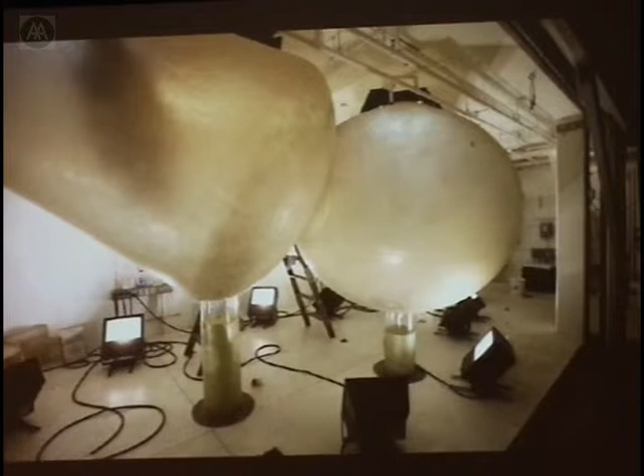In the end, though, it was less pretty women that came investigating the things — we had actually tried to partly hide in the basement. We had probably also not anticipated how difficult it would be to contain the crowds gathered outside. The screaming was so loud that the architectural concept was nearly failing, and you couldn't have any normal conversation inside during the opening day. We almost had to raise the wall again to protect the inside and make conversation possible. In the end, it was maybe more important to realize that the architecture was simply just a footnote, and that it would disappear behind things that really mattered.

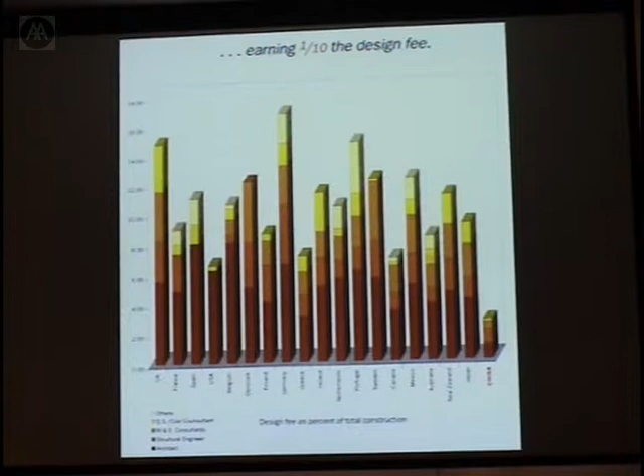It's maybe good to quickly remember what Rem did with the Harvard students years ago, investigating the conditions of Chinese architecture production, which still haven't changed dramatically in most cases, at least not in 2002 when we started. I think the last 3 years have actually implied a rather dramatic change. China had only about one-tenth of the architects of anywhere else in the world, producing 5 to 10 times the amount of square meters designed for ultimately one-tenth of the design fee. Now we're in the middle of it, both in the fees and in the speed and in everything it entails.

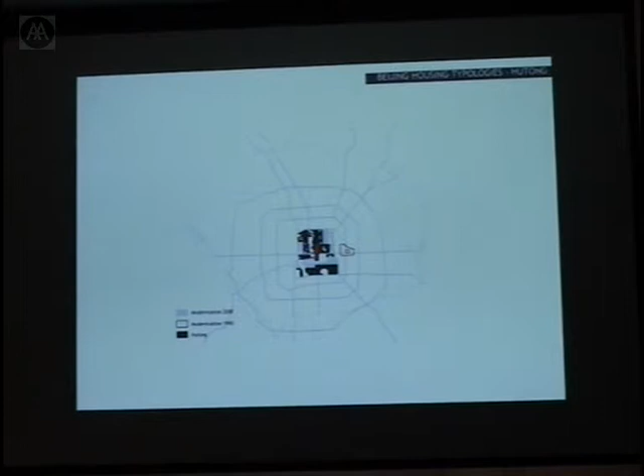At the center of Beijing is the Grand Palace, or the Forbidden City as Westerners call it. Around it, within the second ring road, is the old inner city structure of historic courtyard houses, the hutong, that basically made up Beijing's city fabric for, you could literally say, thousands of years in a very stable and permanent environment.

In 1949, things changed, and Mao declared: smash the old and create the new. After basically a decade of building factories and staging the industrialization of the country, the first real architectural manifestation since the historic age were the 10 Great Projects in '58 and '59, all about 100,000 square meters large, commissioned, designed and built and completed within a single year, less than 12 months. It's very obvious that at that point expertise and architecture were closely related to Russia.

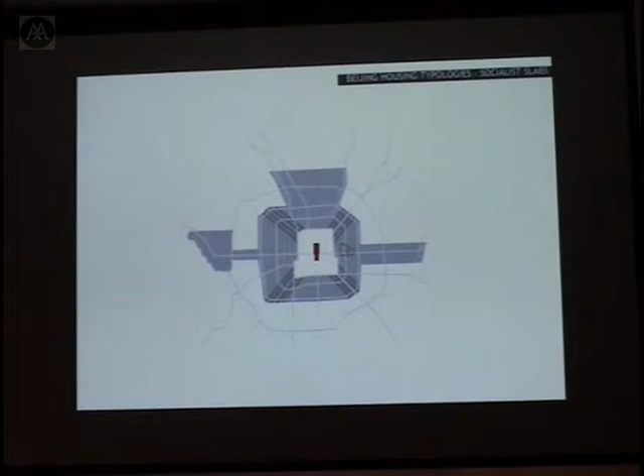After that, the city started to grow rather rapidly in a concentric development around the Forbidden City. Ring roads were built, and the 80s brought a large boom of housing development as a follow-up to the 70s baby boom and huge population explosion. So this is how the city started to look around this area of hutong.

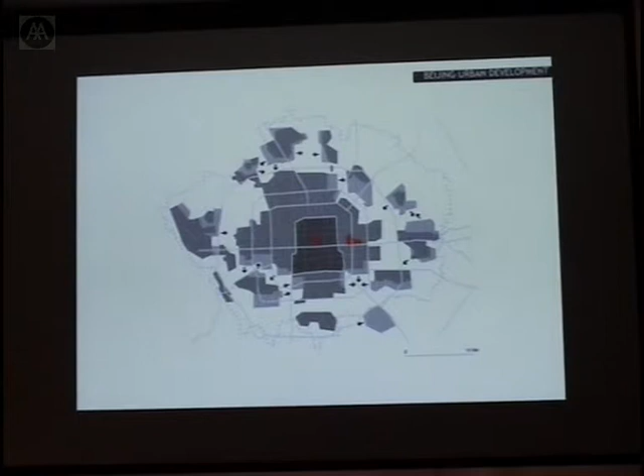While the third ring road was only completed about 12 years ago, in '93, '94, today the fourth and fifth ring roads are complete. The sixth ring road is 80% finished and in use, and the seventh ring road is already under planning. So basically within a single decade, this city literally exploded outwards, and that has obviously meant dramatic transformations for the city and for the life in the city.

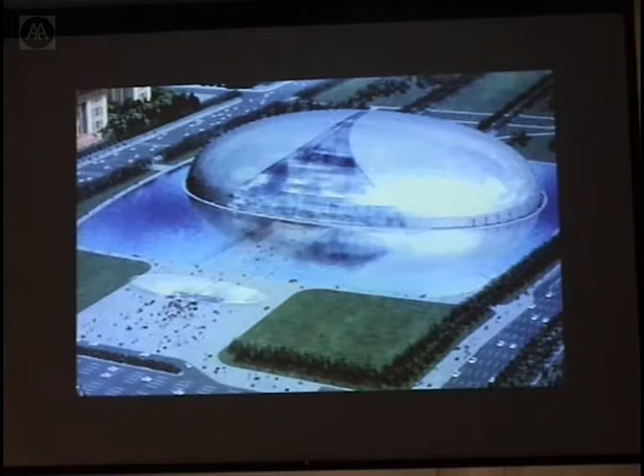But this was only 7 years ago the declared future of China, where foreigners made their first big statement when Paul Andreu arrived to design and win the competition for the Grand Theater right next to Tiananmen Square, basically giving this poached egg, as they say, swimming in a large water basin. Obviously this project has undergone, since Charles de Gaulle and other things, a whole series of loops that one could probably lecture about entirely another time.

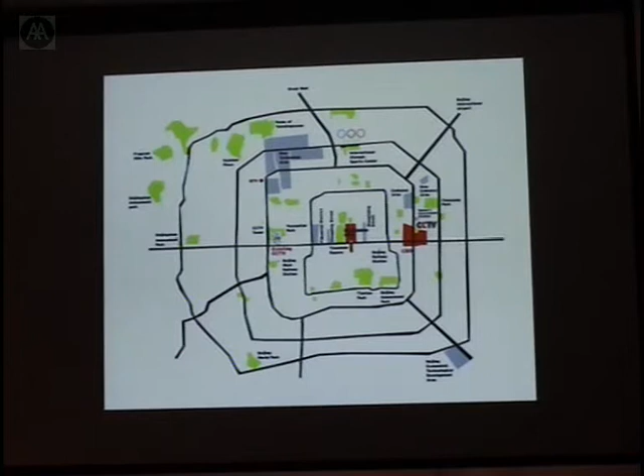CCTV is currently located at the intersection of Chang'an Avenue, the main east-west axis going through the city. In the center, the Forbidden City. This is the second ring road and the third ring road. It's currently located in the west at the intersection of the Third Ring Road and Chang'an Avenue, and will basically mirror across the Forbidden City to the east into the new central business district. The site itself is of an almost unimaginable scale, 20 hectares in the middle of a city.

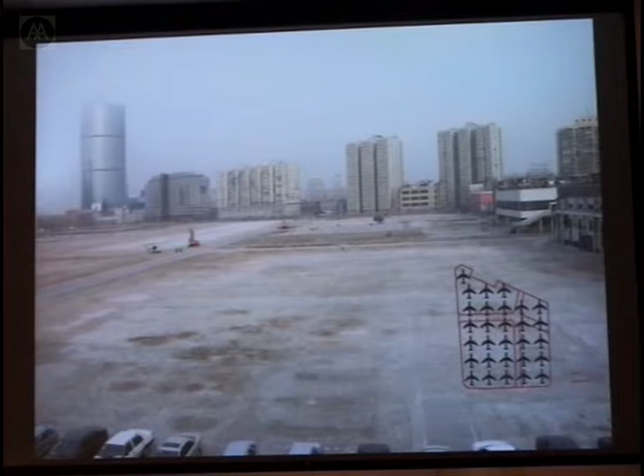And the context is one that's hard to imagine, a tabula rasa that has simply taken away everything that existed on the site. There were car and motorcycle factories that had gone down and were taken away about 2 years ago. And the only sense and certainty you had of the future of this place was this rendering given by the city planners of Beijing, of the dream of how the CBD should look like more or less by the Olympics, so in 3 to 4 years.

It's a very difficult context to design in. On one hand, there is this enormous city with this enormous strength and power, with dimensions that, both in terms of street and buildings, are beyond any scale you've seen before.

Tiananmen Square is also still the largest open urban space in the world. And then there was this vision for a future, a vision given by a dream of 300 skyscrapers emerging in this area.

The moment we came, these are the two towers of the World Trade Center. Here behind is the Kerry Center, and then Jingguang Tower. These were basically the only towers that existed when we started working on this competition. And all we knew was that there would be skyscrapers all over.

It was obviously a very interesting moment for the office to think about a skyscraper. Since Delirious New York and everything that had meant, we realized that OMA had never done not only a skyscraper, but probably not even a vertical building. Everything kind of ended up magically flat. And you wonder how that works with that beginning.

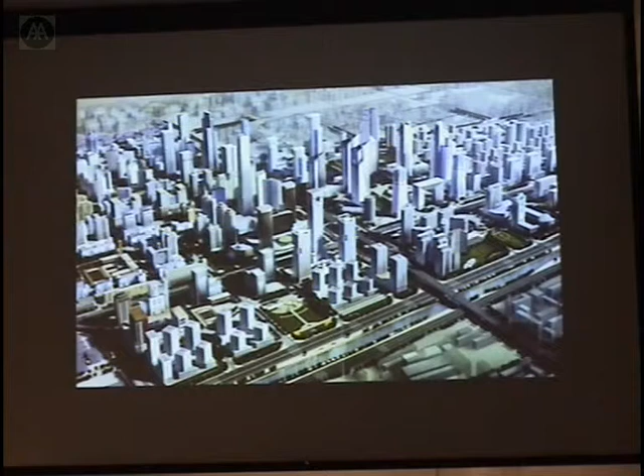But what is happening today, most central business districts have absolutely no such density as Manhattan. Instead, they isolate all towers in a kind of surroundings of green. The only purpose of the skyscraper is to multiply an ultimately valuable piece of land as often as possible vertically, to maximize profits. All that's left is this needle-like piece with no relation to the city, no connection to the ground. At the bottom, a socle or plinth tries to compensate for its inertness, and at the top, there's either a flower style or modernist composition decoration trying to compensate for the ultimate lack of identity.

About 2 years ago, for the first time in history, Asia actually has more skyscrapers than the West. While the skyscraper was born in the US, Asia clearly adopted this typology as the symbol of the growth of its economic power and its modernization. Perversely, this is happening exactly in the past 20 years, when precisely the West, who had initially created this typology, had stopped thinking or writing about not only this typology, but even the city at large, to provide possible starting points for further development.

We felt it was obviously about time to see if there were other possibilities and another sense of designing a structure that would not be all about height, but about re-engaging space and city space, and maybe also a programmatic and content-related configuration that would start to draft up a new possibility.

CCTV is already today one of the largest media organizations in the world, with 14 self-produced TV channels. When the new building is complete, CCTV will be able to broadcast more than 250 channels from this single structure.

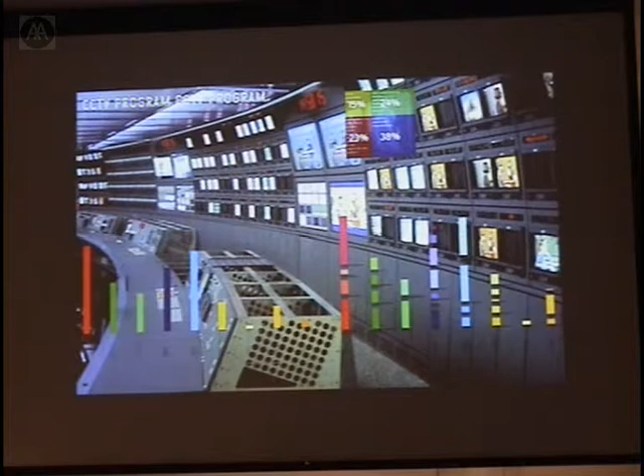The current CCTV site is entirely gated and hermetically sealed, basically, from the public. So this project was also clearly announcing a context of interest in opening up and making itself more accountable to the public, and this was obviously an important part of the design.

We proposed, instead of combining all elements, to actually split the program in 2 parts and create 2 main structures. The main building, CCTV, which accumulates and summons all activities of television making in a single building, and the second building, TVCC, the Television Cultural Center, which would be the entirely public building and contain a 1,500-seat theater and all kinds of other public facilities.

The split we proposed was to guarantee at any point in time the perfect functioning of both entities, because it is still rather unpredictable how quickly security concerns will either heighten or lessen. And even in the wake of something like September 11, any security concern of a high-rise structure now has to be viewed under a different angle.

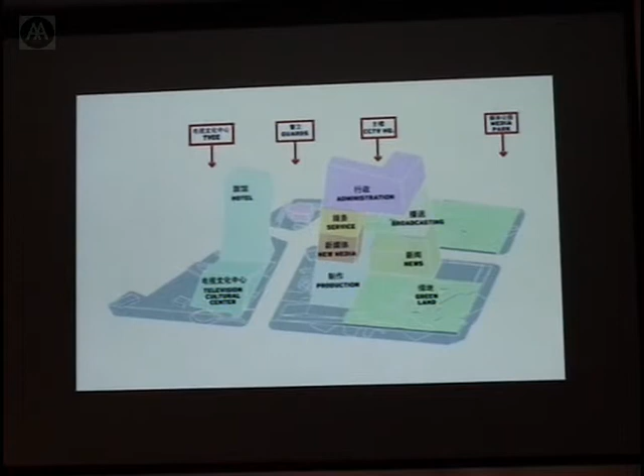So we proposed 2 buildings to guarantee that the public building could always be public, while the main building could oscillate according to need between a secured or also an open structure.

The most important step for CCTV was to propose a loop of interconnected activities where offices, administration, news and broadcasting, program production, services, and research and training centers—so the entire process and all the elements involved in the actual television making—would be combined in one single structure.

The idea was to declare something like solidarity rather than isolation, and propose a structure that would allow for a much more concrete and direct collaboration than opposition between the departments. In the end, a system where the brains would know what the hands are doing, and it might seem more obvious to propose that than it really is.

We already had noticed while working for Universal Studios in the second half of the 90s that most media companies are in a complete disconnect of their departments. Obviously, the world of the digital contributes more and more to a possible physical isolation of the different pieces. And in the end, an organization is not only no longer capable of representing itself, but also of operating or thinking as a single body.

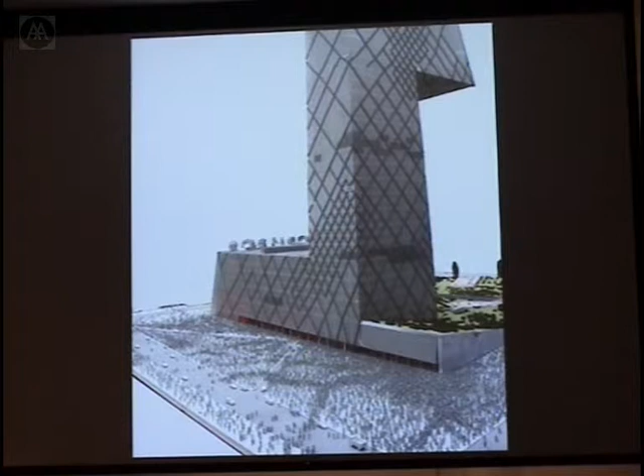And it is maybe not only this, but also the 10,000 permanent staff that continuously occupy the building and the several thousand visitors every day that propose to think of the structure maybe much more as a collective than simply a building. And maybe also this idea of the collective is one that has a specific resonance with a socialist context, and could possibly declare a kind of architectural alternative to a political inevitability that apparently the market and the so-called democracy has become.

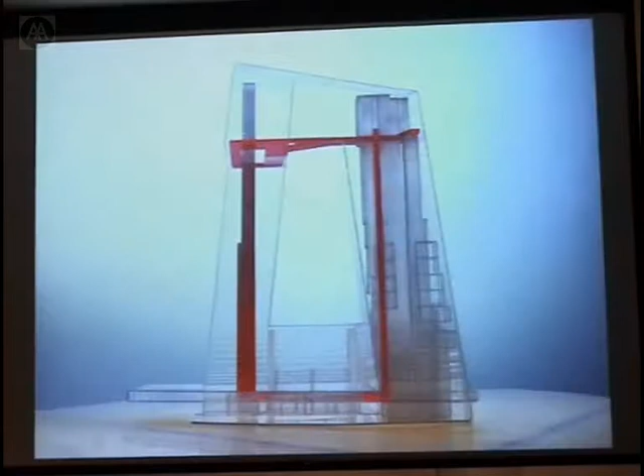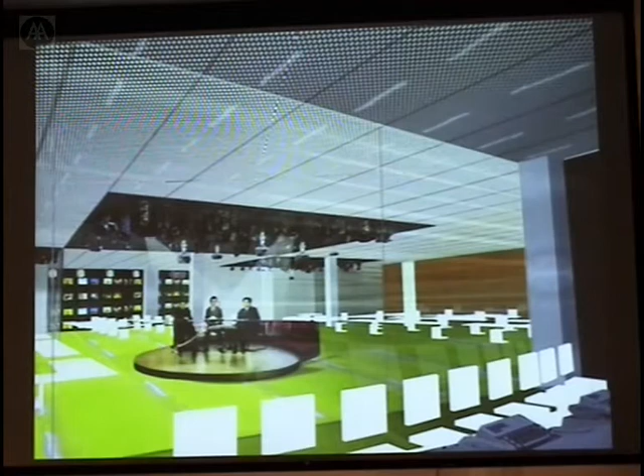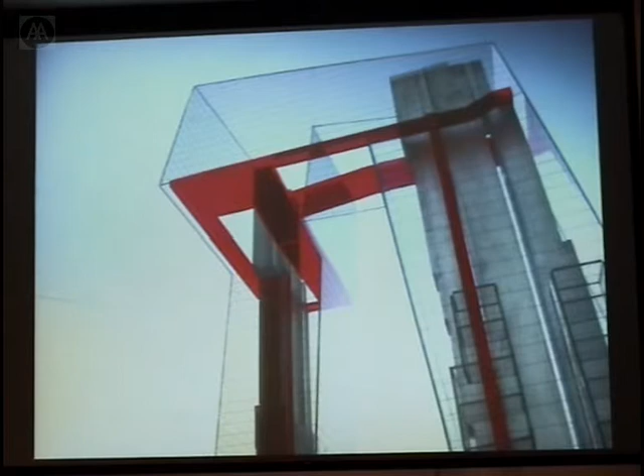The building is basically threaded up by this loop, as we call it—a circulation system for both staff and public visitors that are readmitted to the building to actually circulate through and not only experience CCTV as a media organization, but also visit the studio part, this kind of central city of large volumes with director control rooms and actors' lounges, the main broadcast control center in which the 250 channels will be checked and broadcast, new studios in one of the towers, offices and administration, and ultimately within the overhang at a cantilever of 70 meters at 180 meters height, a public viewing deck onto the city.

Obviously, these numbers imply entirely different needs for the organization of a building. We had to really design a space that would be able to channel 15,000 people daily into and out of a building.

The main lobby exists on 3 levels with a direct connection on B3 to the subway station, the main ground level, and in between layers connecting to the underground parking around the building. The lobby itself splits up into a system of fingers that separates permanent workers and staff from visitors with different security concerns, or the tourists that can actually move along the loop.

The geometry of the building, while the inside is entirely based on an orthogonal system, both towers slope 6 degrees in 2 directions and are then joined at the bottom by the base and at the top by the overhang.

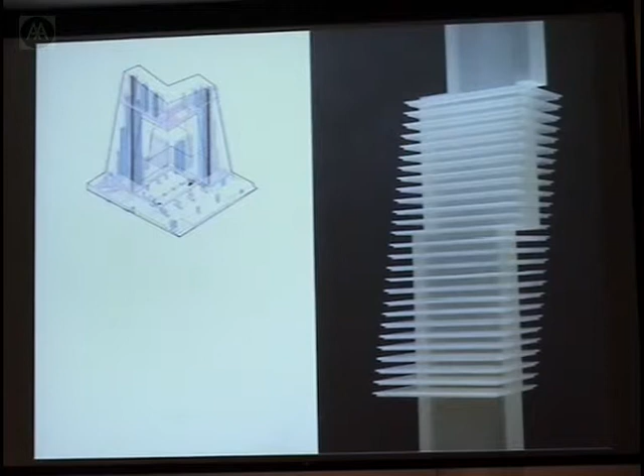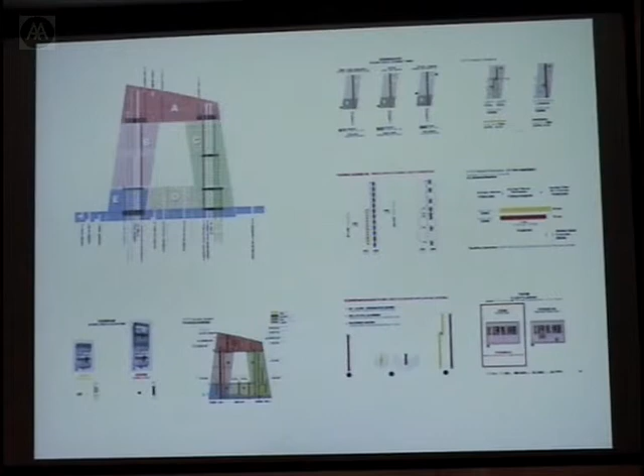Inside the towers, the cores remain completely vertical and contain an elevator system that is probably the most complex ever designed. About 99 elevators serve the building in a system that uses double-deck elevators, so 2 cabins traveling in a single shaft to save space and shuttle people up to the top floors, because it is obviously quite unusual that an actually large building sits on top of a smaller building like a tower.

The structure for the building - while maybe a more traditional approach would have been to split the building again into its different divisions, into isolated sections of big mega frames that would then be connected in themselves - we felt it was maybe much more appropriate or interesting to also here think of the structure in a similar way to the programmatic contents, as a continuous piece, as a loop of continuous forces that would surround the building.

We proposed to cover the building in a triangulated mesh of a steel structure of 10 by 10 meters, so the outer surfaces would actually act like a tube folded in space, and the surfaces themselves would become the main carrier and distributor of the stresses in the building.

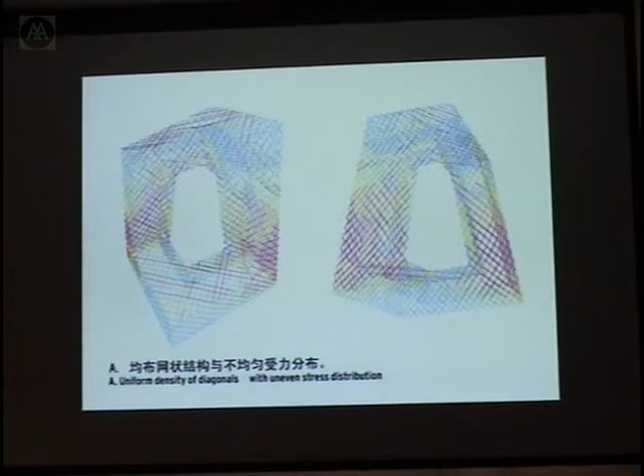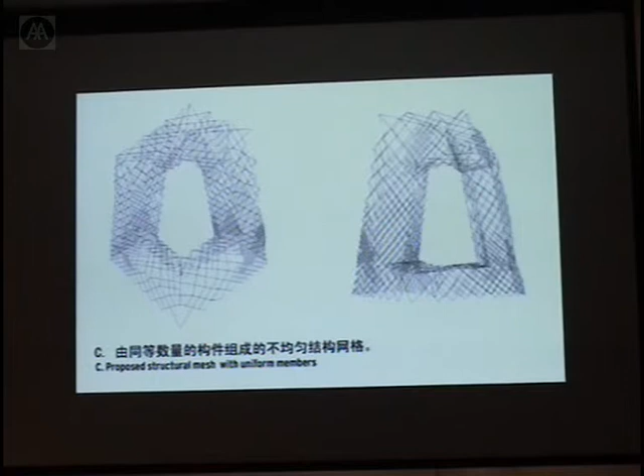Obviously, this complex geometry has by no means an even occurrence of these stresses. What you can see in red are the zones that have to work much harder than others. A more traditional approach would have been to dimension each member differently according to the stress, but we simply added members where more stresses occurred and eliminated them where less forces would occur inside the structure. The result is something rather irrational and unstable looking, but obviously representing in the end the perfectly stable condition of the building. This gave our engineers a lot to think about, and also us to worry about.

In the end, China, nonetheless, it is probably one of the most complex structures ever engineered to date. And China was simply not capable with their traditional means to assess and approve this structure. Maybe many other countries would have been in a very similar situation.

But it is maybe also part of this enormous dedication of that country to the idea of making things happen, and to not stop at their own limits, that a whole new process was thought up to deal with this project. An expert panel of the 13 most senior structural engineers of China was put in place. Expert panels do exist in China, but usually it's a group of people that at the end of a design process simply looks at the design and checks if it's all okay. Here it was a really intense collaboration over a whole year.

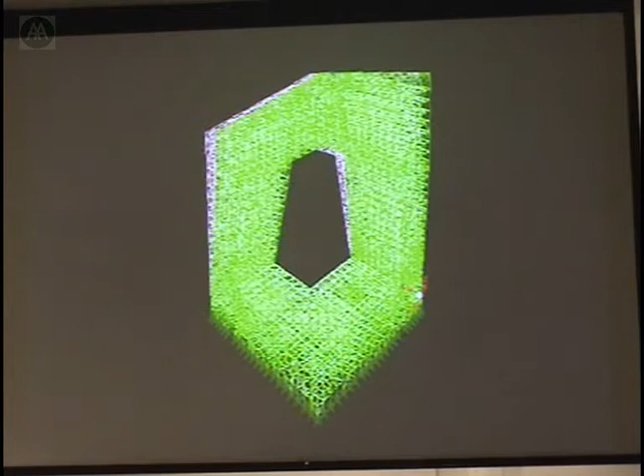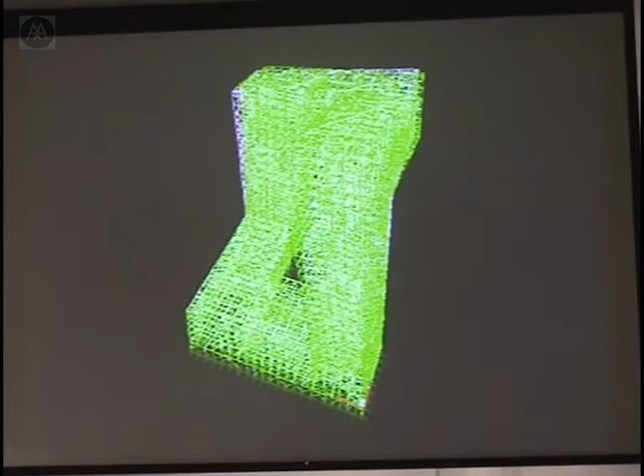Beijing is an earthquake zone, almost as severe as Los Angeles, one of the most severe places to build. So the analysis of the project had to be absolutely detailed and intense. There were more positive moments where the building seemed to nod yes and support it, but there were also more worrying moments, down to almost belly-dancing like situations that could occur.

Ultimately, the structure was designed in a way in which the performance of basically every single one of the 10,078 steel members is known. It's probably by complete accident, but nonetheless interesting, that the number of steel members composing the building is the exact equivalent to the number of people that occupy the building. But it was maybe that and a really intimate knowledge of all the parameters that would shape the design that probably outdo anything ever analyzed about a building before.

Down to the point that the system defined by Arup of not only building up the two towers, but then ultimately connecting this big cantilever in the air, was defined to the degree that this connection could only be made around 6 a.m. and at no other time of day, when the night was at its longest before the sun would rise and both towers would have cooled down to the maximum, to limit the differential stresses inside the structure.

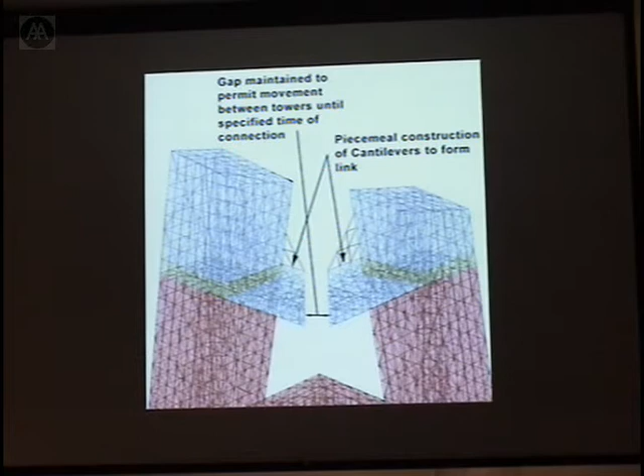Rory, who was actually the engineer on the previous project, is also here today, and we have spent the last years in a sort of intimate embrace on this design.

His wife is also here, but I don't know what she's saying.

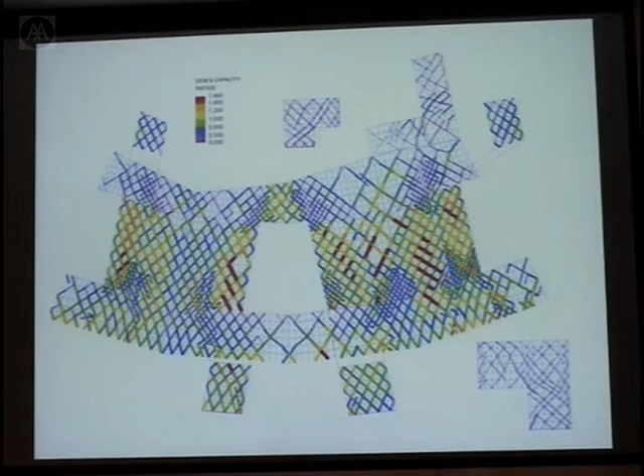And it has really been, in a way, an incredible experience and also an incredible experiment of generating a complete hybrid between architecture and structure, in which both things at this point are completely inseparable and really compose, if you want, the true nature of the project.

For anyone who's ever been in Beijing, most likely what you've seen is this: 70 to 80% of the time the air is not clear and there's no sunshine, but it's actually milky white - a kind of Beijing blur in the air. It's partly because of the approaching desert, so they say, but also the many construction sites in the city. It's a condition that's kind of serious, because it ultimately makes almost all architecture look incredibly bad, and especially any glass high-rise building look incredibly bad. So it's something you can't ignore when you design a building there.

At the same time, obviously, what could happen is also extremely crisp light and sunshine. So how could your building possibly perform in both those conditions? The only buildings that we thought actually survived in both were the ones that weren't completed yet - the ones covered by a nylon mesh and a steel structure, kind of green solid monsters that inhabit the city. And we thought our building could be very similar to this in the end.

What we propose is something based on the glazing that we first developed for the Seattle Library, a kind of laminated mesh inside the glazing that in this case really assimilates a lot of the properties of these green nylon textures, that from the outside is almost solid, but from the inside is completely transparent and lets the city basically shine through. The structure itself we express on the facade - it's basically like a dissecting mesh, almost like a bound figure that structures the big shape into smaller units. These units perform as structurally intact and very tight elements that for all the movement tolerances simply use the lines of the structure to take up and absorb these issues. But the facade itself, in the way it relates to the structure, sometimes the shape itself appears, sometimes it disappears, and only this network remains in the sky.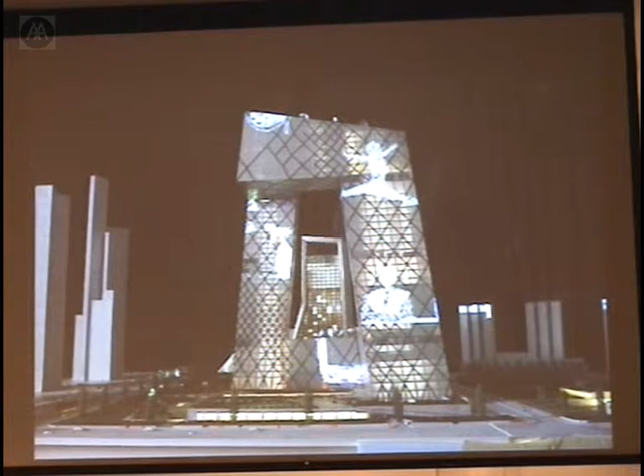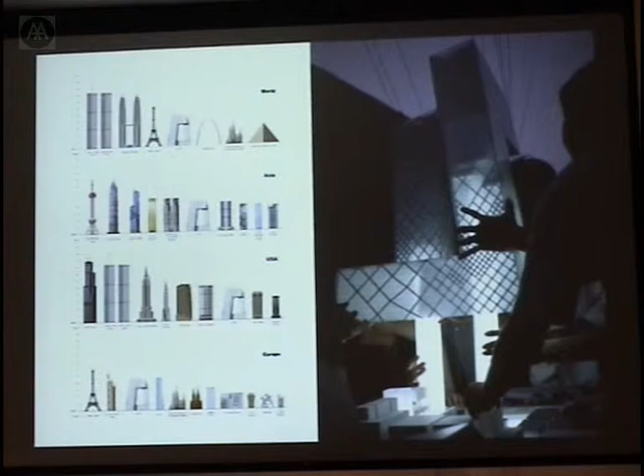The building is so large that any direct expression of its internal functions on the facade is almost impossible. So we propose to add to the building an iconography on the facades that would be partly digital, partly physical, from embossed metal to embedded LEDs in the glazing, that would allow the building to communicate to the city, but also CCTV to communicate to the city beyond the level of architecture. But obviously it's also the architecture itself that declares an iconographic status beyond a sense of height, but maybe through very different properties in the context of other tall structures.

But it is obviously not only CCTV, it is actually two buildings - it's also TVCC, and the way in which the two buildings relate to each other is very much about the project. TVCC we called the weak building. It's in a way a building that has absolutely no concept and no clue. After we had done CCTV, and it was such a strong shape and so complete in itself, we felt you couldn't do another piece that was complete. So we basically just left it at that.

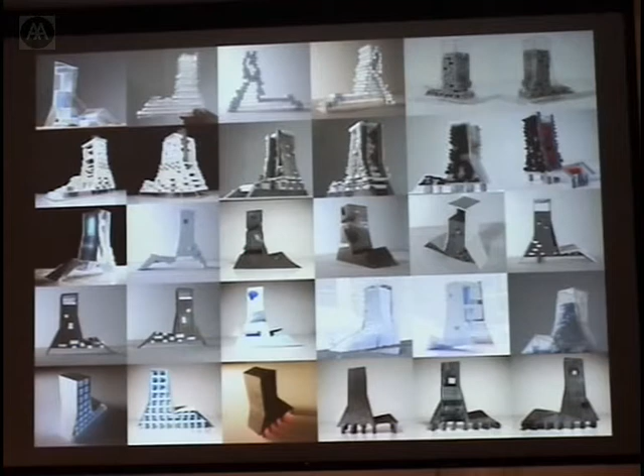We put some of the program volumes on top of each other, looked for a long time at different ways that could work, and in the end just put an envelope over it and said, it's finished. And it has never changed since. Obviously, when you look at the scale of the second building, it is still a size that completely outdoes or surmounts almost everything we've designed before.

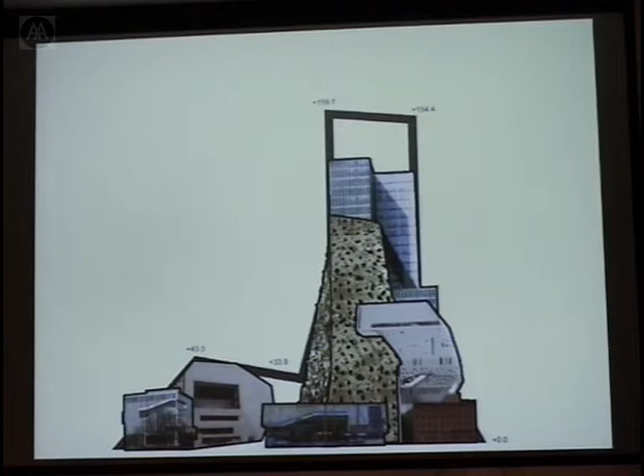It is always easy to forget the second building next to the main building, but I think also a real mistake. It has a 1,500-seat theater, basically as large as the concert hall in Porto, and a hotel bigger than Astor Place, a 5-star hotel. So many things: exhibition rooms, a ballroom, digital cinemas, press release halls, etc. This building in itself we forget too often to talk about.

We were looking for a structure to accommodate all these different volumes. In the end, we decided to pixelate most of the units and create a hotel facade where each room would be an articulated volume inside this envelope. Each room itself is basically a shoebox extruded from the inside, overlooking both CCTV and Beijing.

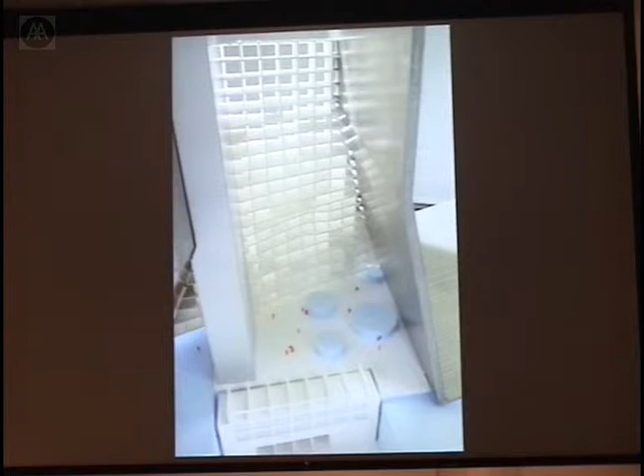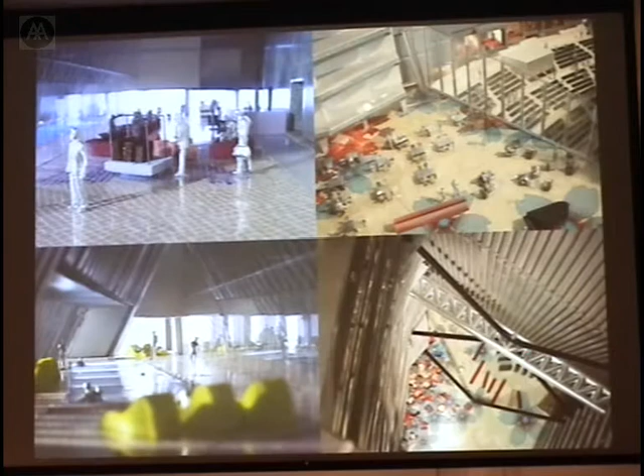The rooms form an atrium of more than 100 meters height inside the tall tower, and the lobby is half swimming pool, half check-in desk at the bottom, on an elevated level 15 meters above the ground, with all its different facilities. The main element in the building is the theater with 1,500 seats.

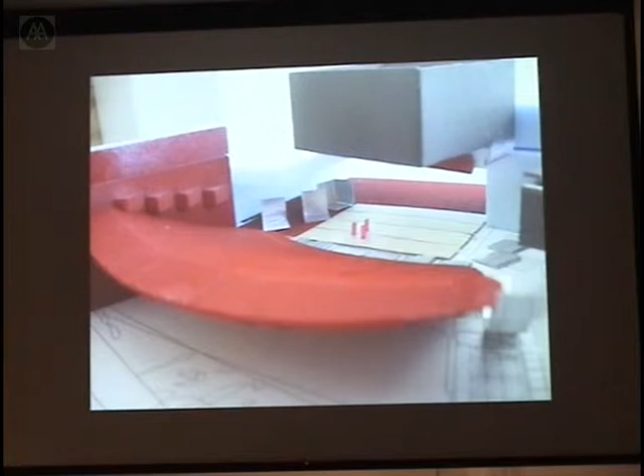While normal theaters of this scale tend to have a large parterre, the largest number of seats attached to the ground, and then add 1 to 3 balconies to increase the number of seats, ultimately they start to separate and segregate the audience in different pieces. We thought it could be really exciting to do nothing but a single balcony that would summon all the seats, where basically everybody would sit on a single floating sail.

We disconnected the sail from the ground, which all of a sudden did something very crucial for this theater. Now when you enter, this is the foyer, you enter actually at the level of the stage. So the whole ground floor, foyer, and stage become inseparable.

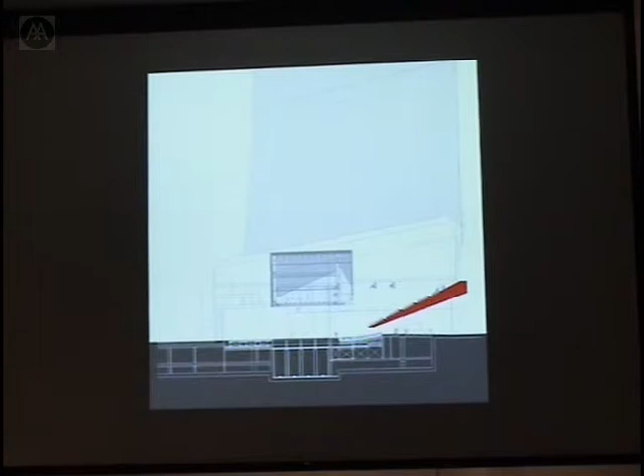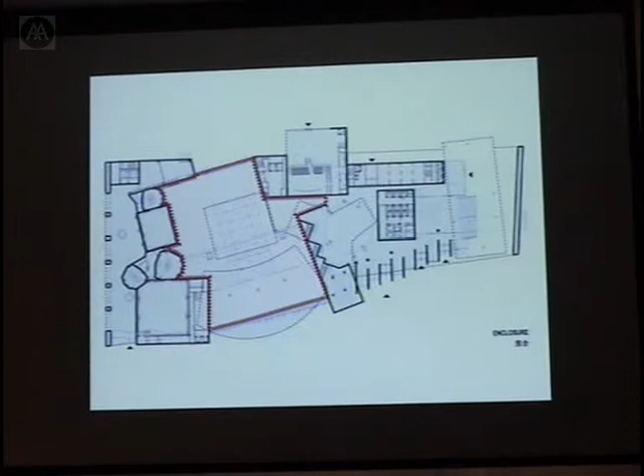The whole ground floor is an entirely plain surface that can be animated and played by a whole series of stage scenery mechanisms. But it also allows a television company to actually use the theater for television making. The ground is now completely flat and accessible for TV cameras to move around, because in this theater there will not only be traditional performances, but also television broadcasting of those.

But it also meant that completely different arrangements for stage and audience were possible. So basically a huge promenade where you could drive or march into the theater on one end, through the entire space, and out at the back.

This is a view of the main auditorium and this balcony, and you can see here this open ground usable not only for more traditional shows, but also for all kinds of further experimental performances.

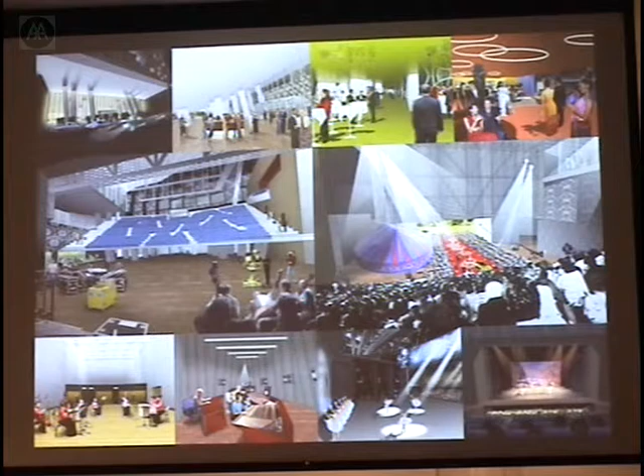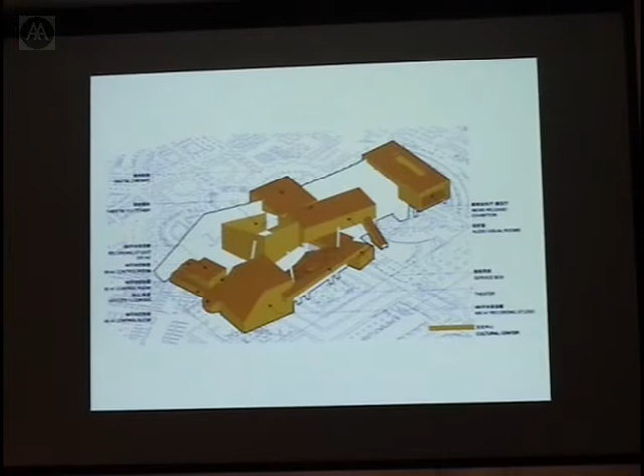This is a view of the ballroom and the ground floor, where you can see this kind of loose accumulation of all these different volumes: big recording studios for any type of music, the theater, supporting functions, AV rooms, digital cinemas, the ballroom underneath, and a box with a press release hall and exhibition spaces.

In a way, the ground itself is almost disintegrating and integrating itself into a texture that covers the entire site, the ground of CCTV, a pattern of Piranesi that we simply overlaid, which then starts to connect all four blocks of the site.

The site is essentially intersected by two public roads: the main part with the CCTV building, the northern part with TVCC, a service building that contains an energy center which basically serves both buildings and keeps them free of most technical obligations, and a whole part in the east that we could keep clear as an extension of the central green axis of the CBD.

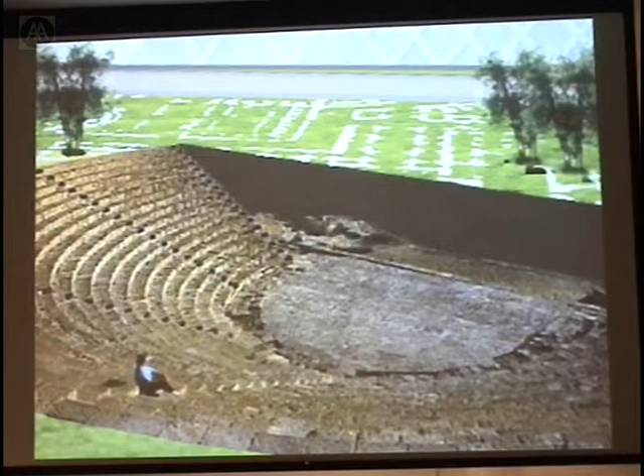This ground is a surface that could be interpreted in many different ways, both as gardens or parks, but also as partly functions and built program, to essentially declare the entire ground a public terrain where outdoor filming could happen, tours for visitors, but also events both for the people and for the politics.

Beijing is growing incredibly fast. There's currently 6,000 construction sites in the city. There's 9,298 projects that are underway, and far more than 100 million square meters that are being built.

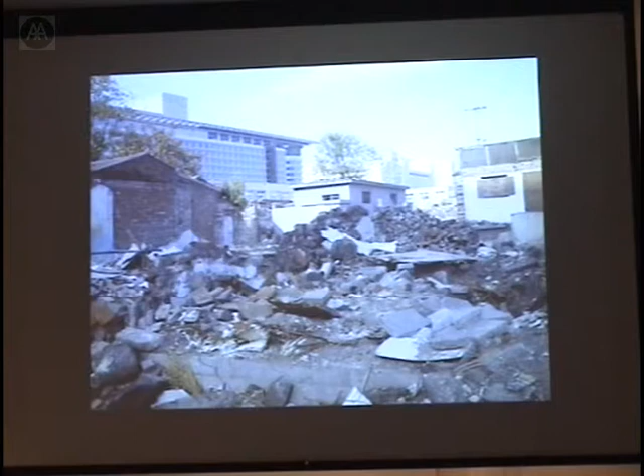This expansion obviously implies an enormous destruction of what is there. In some ways, our project is obviously part of this process of modernization and also part of the process of destruction of the city. So we actually, while we met the city planners during the work on CCTV, proposed to collaborate on a project on preservation of the city.

And basically did that with ambition to possibly not only think about the renewal, but also about the maintaining of the city at the same time. We obviously looked at the history of that, and it's clear that France and probably England were the two that invented preservation and ultimately institutionalized it.

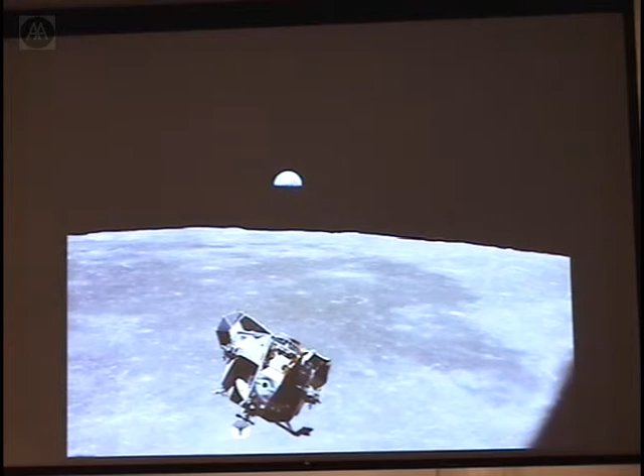But it was also important to look at what was actually being preserved in the world today, and how there had been a movement basically from ancient monuments down to concentration camps and highways, but that with that also the scale of the actual elements of preservation had dramatically changed. Recently, even the proposal was made by an American to declare a site of cultural heritage, the landing spot of Apollo on the moon, and declare it forever untouchable.

But I think what is interesting, despite all these developments, is that although things that are declared worth preserving are becoming younger and younger, there is still this magical gap of at least 25 to 30 years that doesn't seem to close. And once you think about it, preservation has always been very much determined by a rather sentimental way of looking at things. The moment that things are simply old enough, nobody contests that they're worth preserving. If it's really old, everybody agrees. If it's reasonably old, then there's a bit more discussion.

But obviously the point where it stops is exactly the generation of your parents that you hate most. So everything 20, 25 years ago is the worst and should definitely be taken down. The result of that obviously is that the moment things are identified as being worth preserving, most of them have already been destroyed, and maybe the best examples have been destroyed.

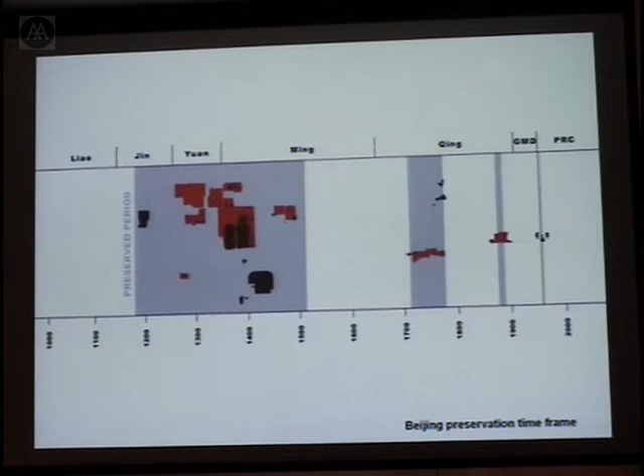So we proposed in this context of Beijing and of China, where also here the latest things that were identified were Tiananmen Square and the surrounding buildings, the 10 great projects, to not hang on to this sentimental, rather European tradition, but maybe rethink preservation in systems that would not only be related to age and time, but maybe rather to typologies, to declare both public buildings and also apartment buildings of all kinds of decades of the city equally valid, but to go further and look at infrastructure and even places of events, not only at a point in time when everything was too late, but maybe as a more systematic approach to this subject.

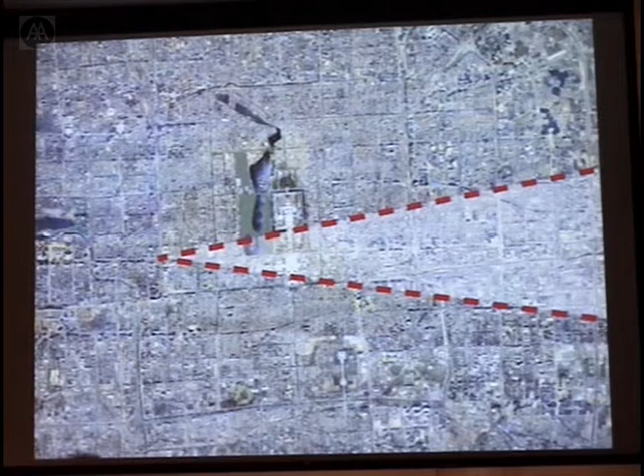We obviously also made more provocative proposals as to how to approach preservation on the scale of an urban map, where Beijing develops in these concentric circles, to say if you would simply keep a wedge of this, you would have something from the oldest inside to the newest outside, or simply an almost random banding of things that would then give you old and new right next to each other.

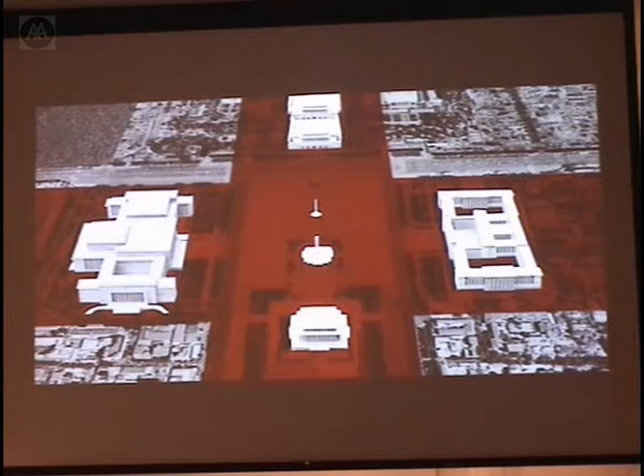I want to show a project that we did, a competition that we did and lost, autumn last year. It's a project that is maybe important precisely in this context of preservation, because it's the project for the China National Museum, which is located here on Tiananmen Square. You can obviously not imagine a historically more burdened location than this. You have Tiananmen Square, the Forbidden City, Mao's mausoleum, and the Great People's Hall on the west side of it.

The building itself is one of the 10 great projects and is an architecture that is both so overwhelmingly strong and maybe possibly weak that it is incredibly difficult actually to design for this, and not only an architectural but obviously also a generally historical question for how to interact or intervene in a structure like this.

The competition brief proposed to extend the building to the east. The museum had acquired a strip of land to the east, and basically the doubling of the program was supposed to happen in an extension to the existing building. When you look at the existing building, though, you realize that it is almost entirely empty.

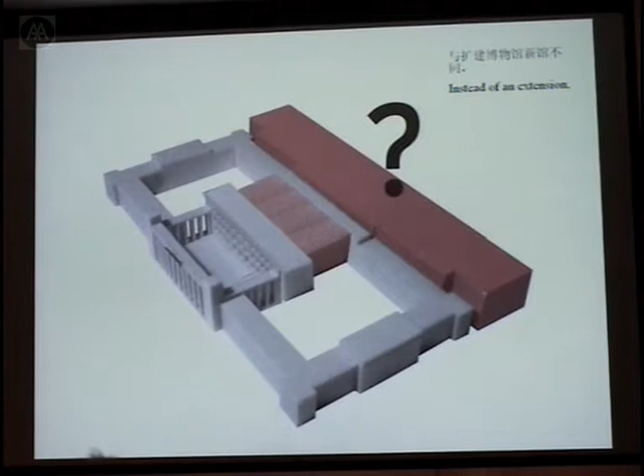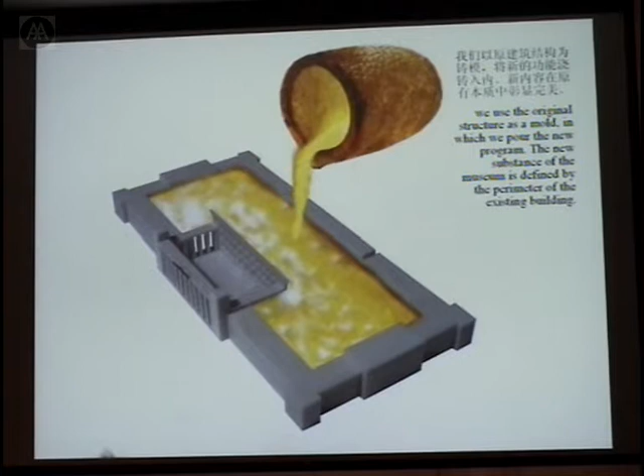So it was, if you want, artificially inflated beyond its actual programmatic content to inscribe itself in a correct urbanistic context. So what we proposed was to not add anything new to the old outside, but to simply pour the program into the center of the building, declare the existing building a mold into which we would simply sink all the new requirements and densify the existing structure. So it was like building a new building in the empty center of the old.

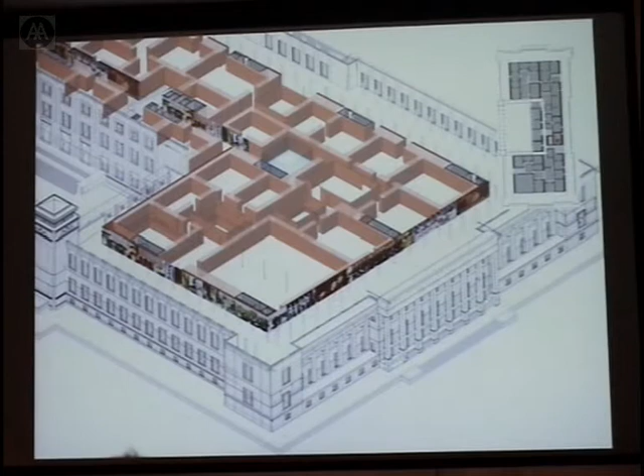So we wanted to use that and unrolled it around the perimeter of the existing structure, so that this mold would hold potentially a complete chronology of Chinese history, and built into it a system of rooms, cells and spaces allowing for flexibility within, but ultimately a completely connected tissue of spaces that would let you circulate through the linear history, but also shortcut into the different rooms and compartments inside.

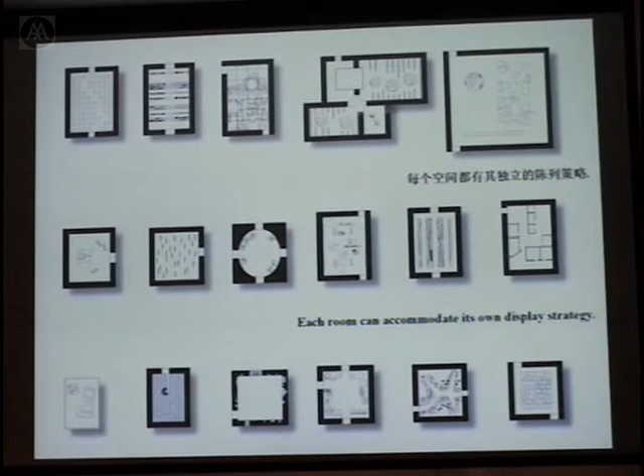Each room could assume totally different characters, from traditional gallery spaces to almost aquarium-like conditions where, in a transparent tube, you would be channeled through almost solid exhibits of pottery and other artifacts.

These rooms themselves would be suspended inside the building, underneath containing a large public plaza. The system would allow for continuous recurating of the structure and the exhibits, exploiting the changing relationships between the two parts the collection is made of: historic China, and the history of the revolution, essentially the past 50 years, which interestingly occupy about the same quantity of space.

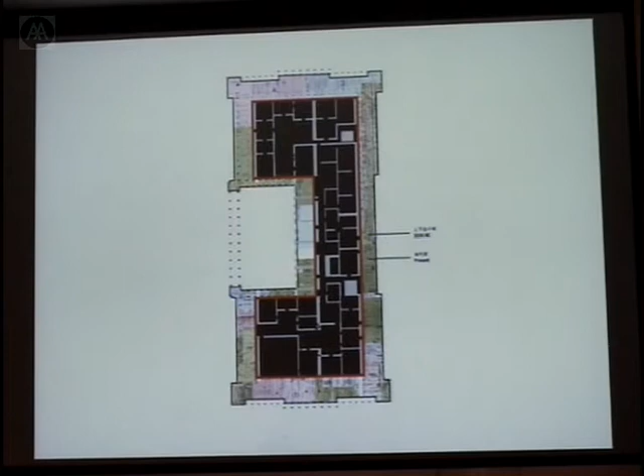The only element of true newness we proposed was an interface between the old and new: a media wall inside the building, the most flexible and completely changeable piece of information, containing both graphic and text-based content that would negotiate between the old and new exhibits, and the only thing visible from outside the building.

So as to leave this existing structure entirely intact, not confronted directly with a new architectural object right next to it.

We obviously lost the competition.

It was interesting to realize this, because there is an extremely vivid debate in China about architecture. There's a website where many things are published and discussed, our project as well as many others — a community of discussing people so strong it probably outnumbers any number of architecture students in a country this large.

And it's a debate that takes very strong positions. One of the things we were accused of was coming in and designing such an imposing and visible structure as CCTV.

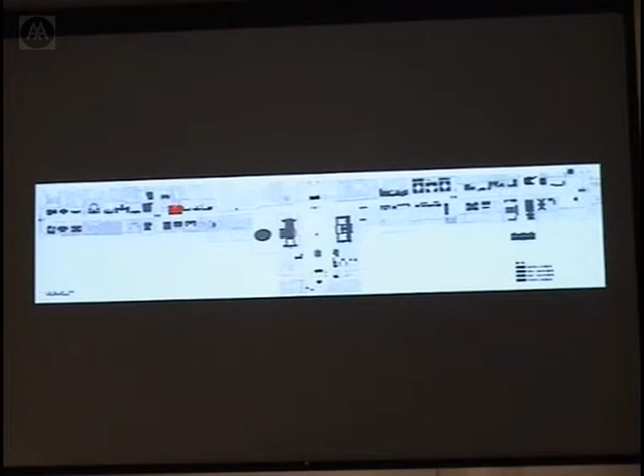This is Chang'an Avenue. Here's the museum we just talked about at Tiananmen Square, and this is the theater by Paul Andreu. The bookstore, located on Xidan Square, is not too far away down the road. Moving along Chang'an Avenue, we've seen this building before — it's really a series of large monumental volumes, each manifesting a presence in its own particular way.

There is an existing bookstore, this building, completed only 5 years ago — 50,000 square meters of floor area. The competition actually asked to extend this building and add another 50,000 square meters, for a bookstore of 100,000 square meters total. When we designed Prada, we thought that was a big store at 2,000 square meters — it was almost implausible to think you could design a bookstore 2.5 times the size of the Seattle Public Library.

But once you go there and enter the store, it's not only full of people, it's actually full of people reading — everywhere people sit, stand, and read. It's a building used by up to 50,000 people a day.

And it's a building that really operates as much as a library as a bookstore. Although sales are huge, the actual consumption of reading, the activity of reading in there, is so strong that it all of a sudden rendered this whole proposition probably entirely plausible and not completely absurd.

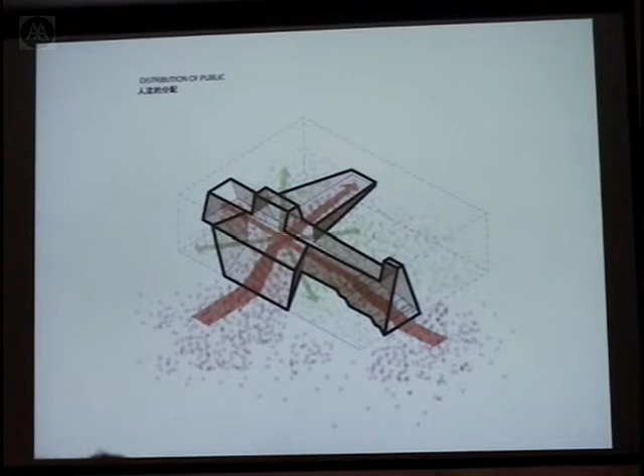What we proposed was to address the public, but also handle the large quantities of book readers and buyers, to take both buildings into a single volume and unite them through an internal space, a void, a public plaza that we would cut through both structures and use as a central distribution system into the then 4 separate quadrants of the building.

This would also structure the building from the outside, define large openings to both Chang'an Avenue and the big square to the west of the building, and basically provide elements in the context and scale of its surroundings.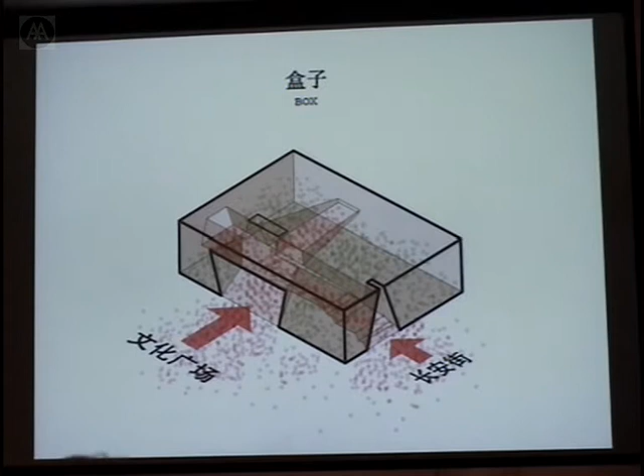The plan itself, here you can see this public cross that was accessed mainly from 2 sides, implied a complete reorganization of the interior. This is the part of the existing building that we completely restructured. We actually put all offices into a new sliver on the east of the building.

But also, this idea of bringing the public inside, we wanted to kind of turn the whole structure inside out and then actually bring the books to the outside of the building. So to think of a facade that could be something like a translucent bookshelf in which the activity of people reading and buying would actually start to animate the building, and ultimately animate the facade as a kind of pixelated surface on the scale of the city.

After we had won the competition, in the first meeting, and after we had signed the contract for the project, the client came and said that actually everything had changed. That they didn't own the building by themselves, but that there were two other parties, a steel company and a bank, co-owners of the building, and that they had simply decided they weren't very interested in this transformation and that absolutely nothing could change about the existing building.

So what we had proposed here, a complete restructuring, actually rather looked like this. In reality, an existing space of the bank that couldn't be touched, existing lobbies and entrances that all had to be maintained. Plus the client declared that they had actually picked our project but never really liked the idea that this cross-shaped space would completely separate four parts of the building that would no longer be physically connected to each other, and therefore make it much more difficult to merchandise the space.

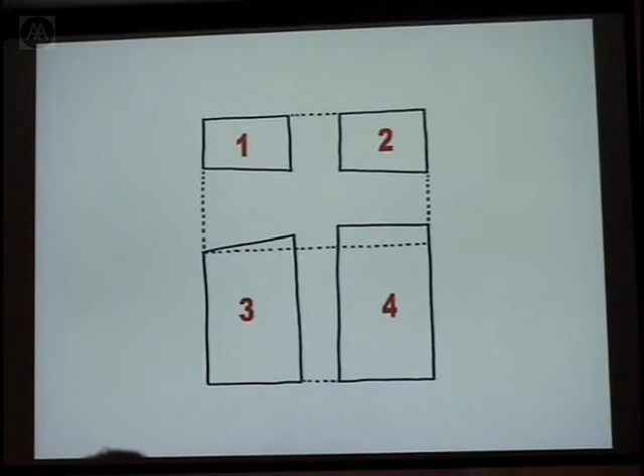So the dilemma was reasonably big, because at the same time the project had to continue, since this also had to be completed before 2008, before the Olympics. So the question was really, how could we invent a new design? We had basically 2 weeks for this.

How could we invent a new design that, for the existing bookstore on 4 floors, completely respects the integrity of the old structure, not do anything to it, but at the same time change everything about it? By the way, the client had also cut the budget exactly in half in the same go. So that required a new simplicity of thinking for what we would do.

And the idea then was to completely change the concept and say, if what we did before was to isolate or separate different parts, maybe we could simply create something like a connector that you would put next to the old, and without physically changing it, imply a condition that would completely transform the old.

The new building is a system of ramps that connects to each horizontal floor plate of the old building, so that now all of a sudden the entire building is a single spiral, and you continuously move from new into old, from old into new, to circulate through the building.

And that also as a principle would actually allow these 50,000 people a day to not be confined to escalators for vertical movement, but actually to circulate the whole building.

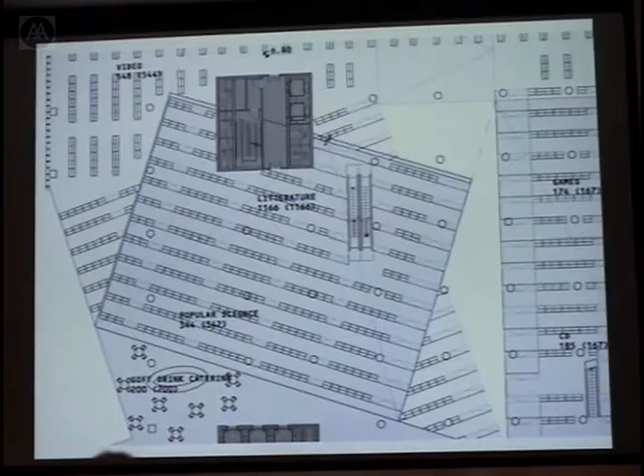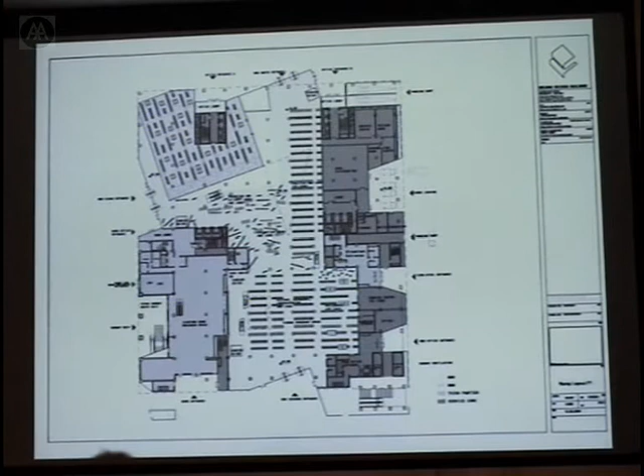Each one of the ramps again imparts an idea maybe first invented with Jussieu, partly built in Seattle, but they're really as a book container, and here now as a system that while it would encompass a completely handicapped-accessible ramping typology, would start to spiral up the building in completely different configurations and characters for each department and section of the sales area.

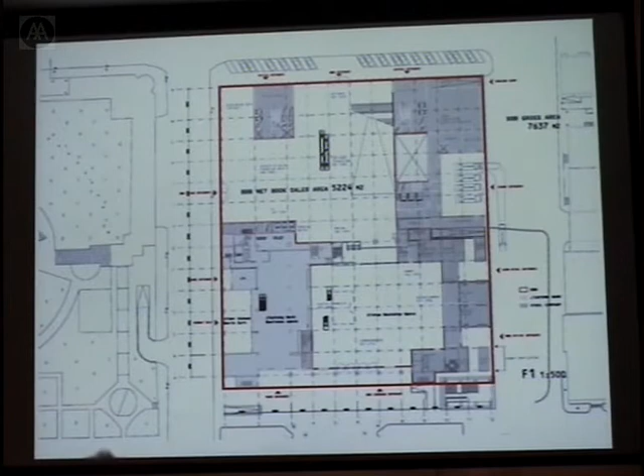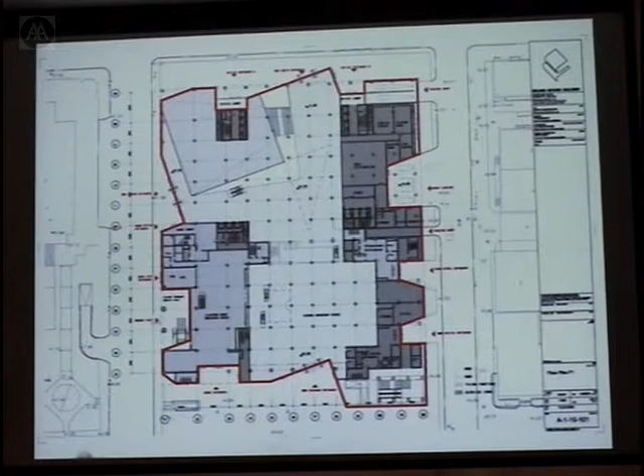The competition proposal had built out the existing structure 9 meters to the south to include a subway station and add this new facade related to program. But so a way to basically re-include all these elements, and in a way a geometry that all of a sudden also started to inscribe itself surprisingly well in this complex context of other structures and the square around it.

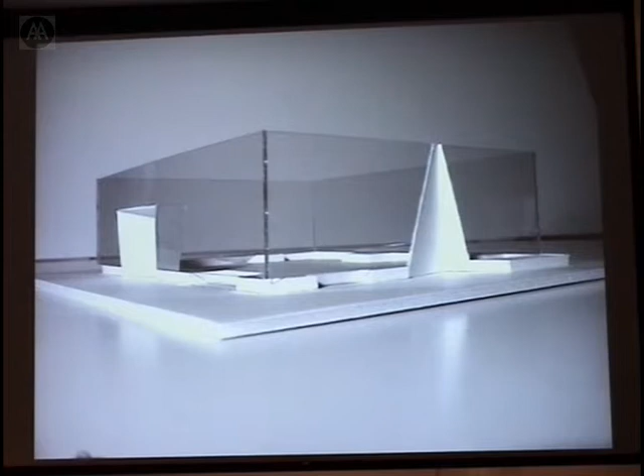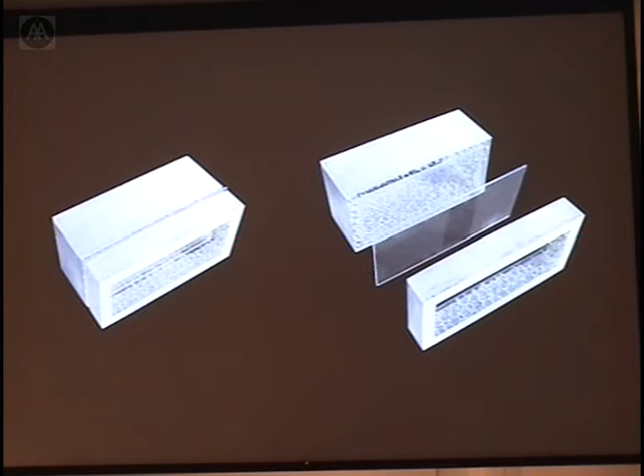In a reversal of the maybe classical typology of the heavy box above and the glass floor below, we actually made it a steel envelope, partly perforated but essentially solid, that forms the base condition. The box itself we still develop in these translucent glass blocks that we've started to prototype and develop as a basically masonry wall, like bricks made out of glass, 1 meter wide by 50 centimeters tall, that will compose the facade of the building.

2004 was a difficult year.

It started really with a phone call that I received, I think 4:30 a.m., sleeping in the hotel, from a very upset colleague from our PR department who told me I immediately had to call someone from the London Times because he was about to write an article that would announce the death of our project. I made this call, and despite a 1 hour long conversation, the next day the London Times published an article that was the beginning of an avalanche of rumors and news for an entire year that continuously declared the project over and dead. The Chinese Prime Minister was even quoted in this article, and afterwards was apparently extremely upset about the manipulation that Western media would undertake of the realities.

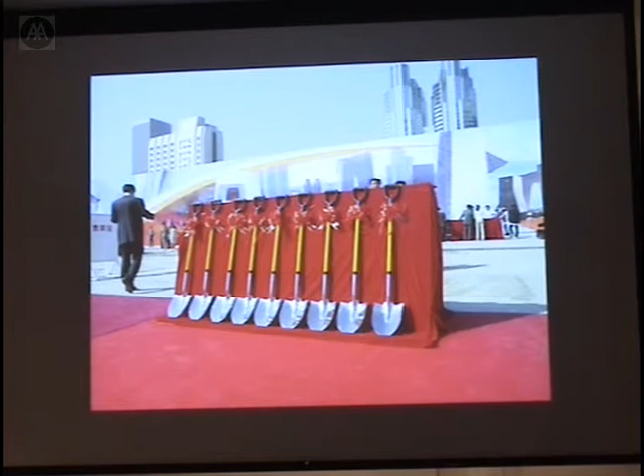After all, September last year, the groundbreaking happened for the project, and the client assured us it would be a tiny, intimate event to which we basically shouldn't even appear. It was a tiny, intimate event—only a few of their staff were allowed to come. But obviously we felt slightly different and overwhelmed by the moment.

It was an incredibly cheerful moment for the team, but maybe not only cheerful, but also scary, although support was much larger than partly anticipated at first.

If you really realize what you have drawn, this is the footprint of CCTV. Here you see the base and the big plinth that occupies the ground. It's basically 300 by 300 meters that have started to excavate into the ground. The hole is growing with such incredible speed that it has completely outdone all our predictions for timing—we are two months ahead of schedule now.

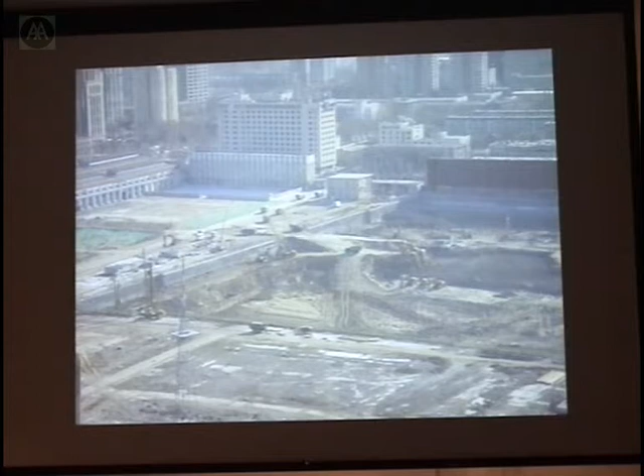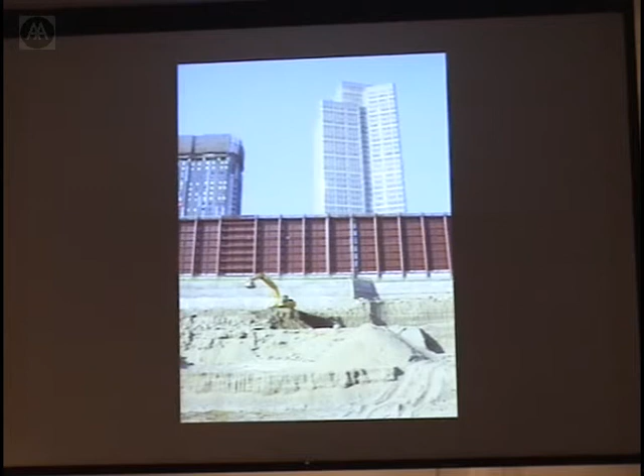As you see the hole grow, you really realize what you're about to do there. It takes you 20 minutes to walk from one end to the other through this hole. And when you stand in the middle of it—this red thing is a person, and there's another person—you actually start to realize what the hell you're doing there. Thank you.

Ole, thank you very much. I'm glad you're surviving it all. I'm very impressed by what you've shown. I wonder if anybody has any questions for Ole that they'd like to ask.

People are very shy here, I'm afraid. Yeah, in China, there's a lot more questions after.